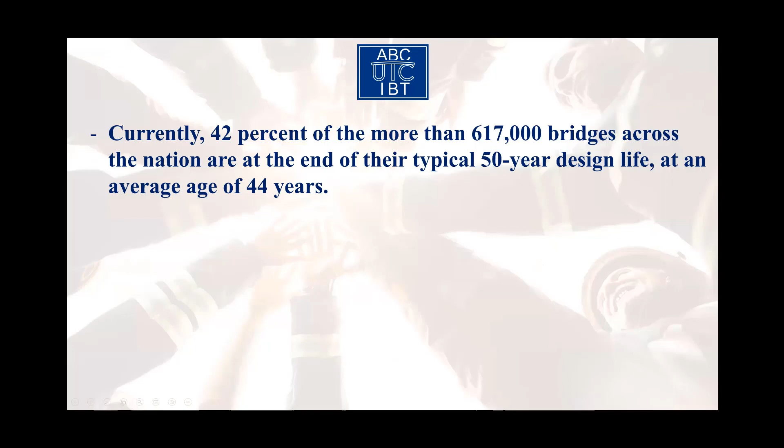So why do we concentrate on bridge engineering? I must also say that up to now we were only concentrated on accelerated bridge construction, which is a form of constructing bridges. Contrary to what you see in the mass media, accelerated bridge construction is not a shortcut. The total construction time of building a bridge is the same or even more than the conventional case.

All it is, let's say for example, if you want to build a bridge, you have to close the lanes, close the traffic during certain times of construction, and that causes a traffic jam. It causes accidents because construction zones are usually a magnet for accidents. There is lots of interruption to people's daily life, and health-wise it's not very good. You guys can relate to that when you're stuck in traffic for hours and hours.

This problem becomes more serious considering the fact that we have 617,000 bridges in the US, but 42% of them, say about half, are going to reach their 50-year design life. There's a difference between design life and service life. We designed these bridges for the type of traffic we guessed would occur over the next 50 years. About half of our bridges in our inventory are going to need some action, whether repair, retrofit, or replacement.

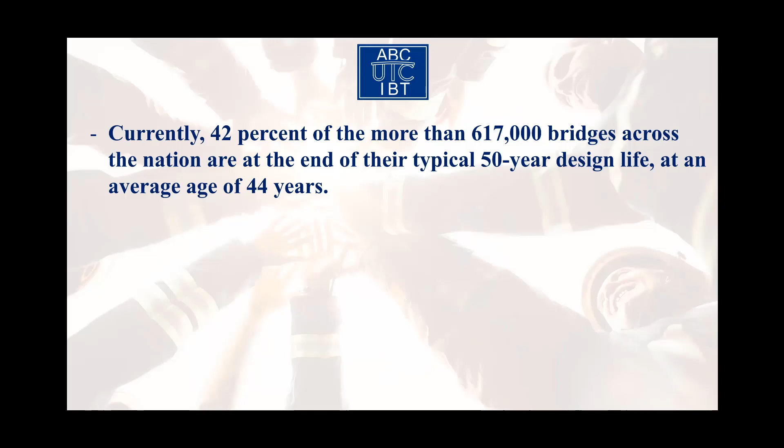It doesn't happen just by advertisement or marketing, things like that. It doesn't happen that way. It happens by technology. So our task is to bring all types of advanced technologies into bridge engineering in the US and communicate that with our stakeholders, the bridge owners, state DOTs, municipalities, and so on. That's why the research we're going to do is so interesting - it's going to be multidisciplinary. We're going to have our faculty work with us closely to tell you about their areas of research.

At the end, I will come back and show you a couple of areas that I work in myself. But before that, I want to show you a video clip that hopefully will tell you how influential we are with bridge owners across the US. I'm going to show you a short videotape recording from one of our conferences in 2019, which really shows our connections, how we connect with industry, and what kind of influence we have. So let me show you this piece of video.

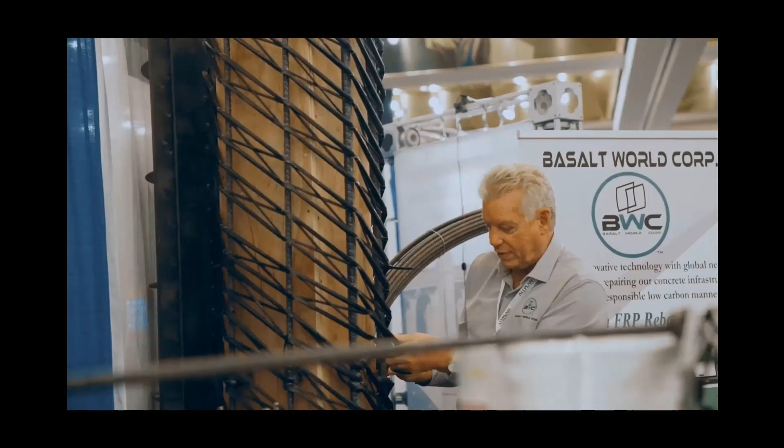We have exhibitors with the latest in innovations, materials, and technologies to support the ABC implementation effort. We have all the experts, those who are making things happen in ABC around the country here. You can talk with them on a one-to-one basis. It's a great opportunity for anyone in the bridge community to participate.

This year's conference is great. There's more attendees than before. It's been very good - we had a lot of traffic at our booth, so we're happy with that, and definitely met a lot of quality people.

This is a great conference. Not only are we talking about theoretical use of accelerated bridge, it's actually a lot of practical solutions.

Whether you are integrated with your ABC and just how you do business, whether you're just starting out, whether you want to advance what you're doing, this conference offers opportunities in a variety of areas. Great networking, the content of the presentations has been fantastic, and really, I've gotten a whole lot out of the exhibit hall as well, interacting with the exhibitors. So I definitely recommend attending the conference.

The award program provides an opportunity to showcase innovative projects and to recognize talented individuals that advance ABC. I think it's important to acknowledge what the industry is doing, and I think we need to continue to highlight people and projects just for the sake of ABC becoming common practice.

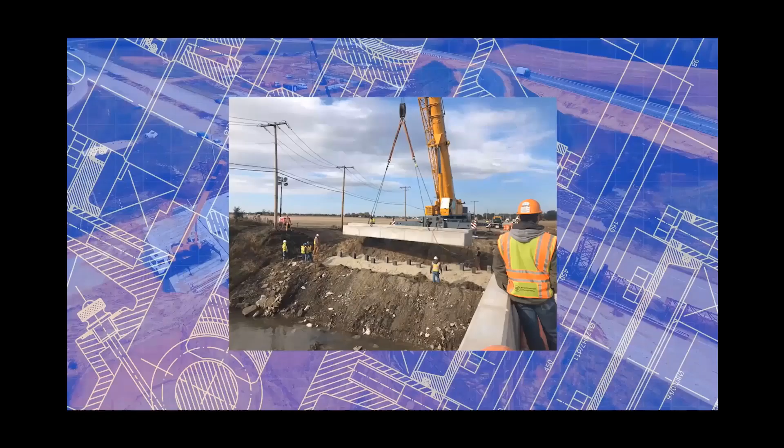We need to get it involved in every project. It's the right thing to do. It minimizes impacts to the public, it improves safety, it improves quality, and it makes me really proud to get this award because I know I was doing the right thing.

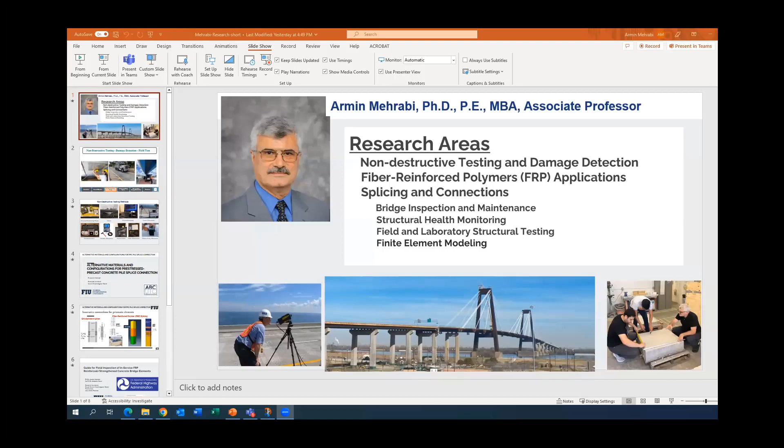Thank you very much, Dr. Azizinamini. So again, my name is Armin Mehrabi. I work at ABC UTC Center, and an extra point is that currently I'm also graduate program director. So for those of you who like to join our graduate program, I will be your first contact, and I will help you through going to graduate program.

And if you are interested in any of the fields and topics that you see today, we'll make it happen that you get an internship or other positions with the center.

So the areas that I work currently, and I have been working for the last 30-some years: non-destructive testing and damage detection is one major area. Then from the relatively new materials in construction and bridge construction, especially fiber reinforced polymers and composites. I currently have several projects in methods of splicing and connection structures. Sub to that, minor areas include bridge inspection and maintenance, basically structural health monitoring, field and laboratory structure testing, and advanced analytical models like finite element modeling, etc.

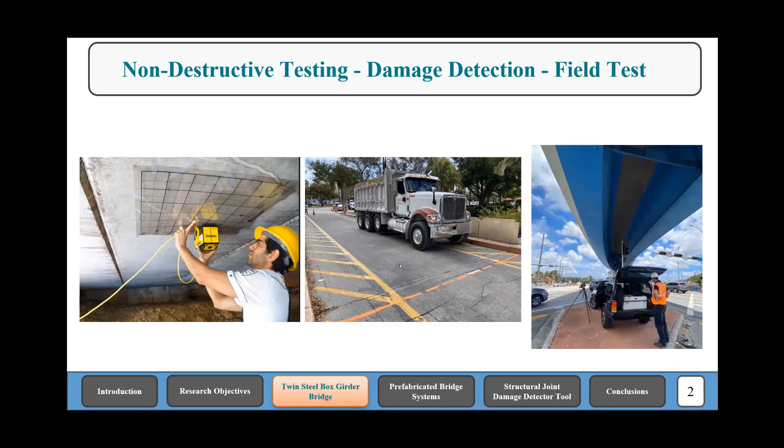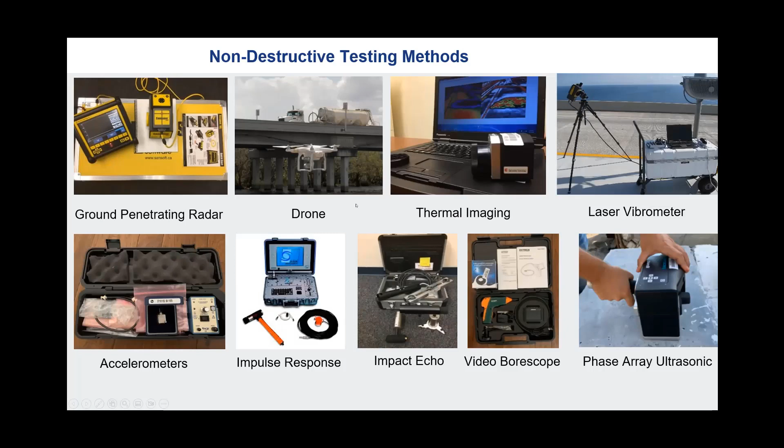Again, my team, which is part of ABC UTC or IBT ABC UTC, possesses - that's the important thing - so we have in our group most of the major non-destructive testing methods available and devices, including GPRs, drones, lasers, thermal imaging, etc. So we are kind of rich in that aspect, fortunately.

Just a couple of projects that I've worked on as examples of what we have been doing. One that is very dear to me and my team is a project we did for the ABC UTC, looking for alternative materials and configurations for pre-stressed precast concrete pile splicing connections, basically to splice the piles that come to the field for driving into the soil. So we went ahead with this project.

It gave us a lot of products, including methods and means applicable not only to the piles, but to all prismatic structural elements as well. So this is a sample of how ABC UTC, or IBT ABC UTC, can help any topic that people are interested in get to its maximum potential.

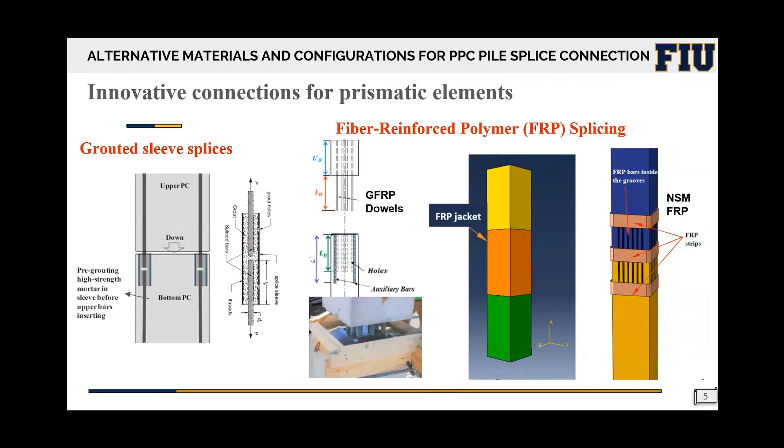As part of that project, we proposed 3 different new connection methods: grouted sleeve splice for prismatic elements, and splices using fiber reinforced polymers, FRP. We received 3 patents on this. That's amazing - during the life of the project, about a year and a half to 2 years, we received 3 patents.

Another project I'm doing for the Federal Highway Administration is developing a guide for field inspection of in-service FRP, fiber reinforced polymer, reinforced and strengthened concrete bridge elements. Interestingly, after so much work on inspection and NDT testing, there is no guide for field inspection of concrete elements that use FRP. So our team took over developing this guide.

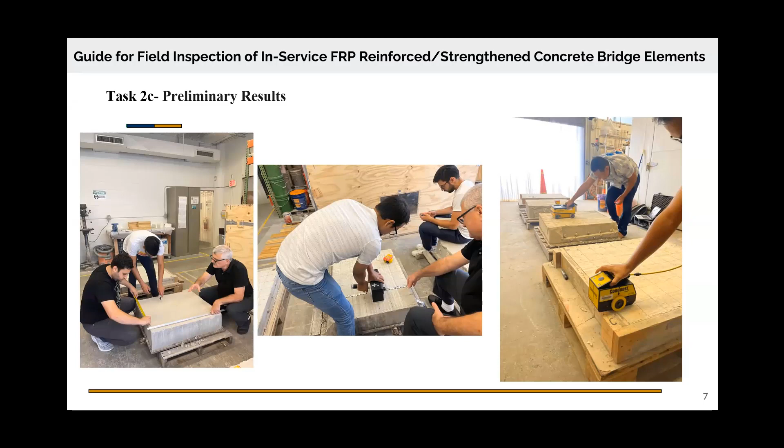That project, in addition to analytical work and review of other works, also involved constructing several specimens, as you can see. I want to include this picture because our work includes lab testing, field testing, analytical work, etc., to give you a picture of what's really going on in these projects. These pictures really show the type of the work.

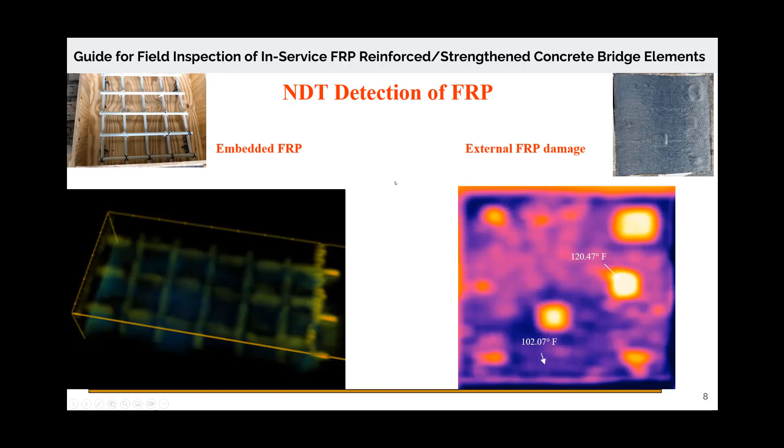As Dr. Azizinamini mentioned, anybody interested in any of these or other topics, please get in touch with me and other faculty. We will be more than happy to help you through the decision making. Thank you all.

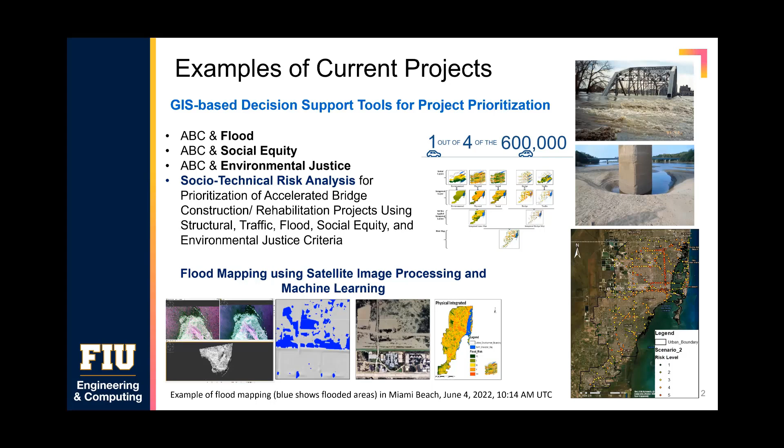So I have another slide for you. These two projects were kind of what we have been working on, and this is just to give you some ideas for the future. For the new center, or the extension of the ABC UTC, which is the Innovative Bridge Technologies, we are really looking out of the box at related technologies that can affect and work with bridge technologies.

Just to give you a couple examples, one idea is to have climate resilient bridges. You've heard about climate change effects in different parts of the country, and each part of our country is being affected by different aspects - extreme floods, sea level rise, excessive heat, wildfire, mostly in the West. These disproportionately affect people, so social equity and environmental justice are also involved.

So the problem here is how to understand the linkages between our bridge system and these different effects of climate change, and how we can address these issues in our projects.

So this is basically a multi-scale problem. First of all, we need to understand the linkages between these problems. This is like a system of systems problem, because each of these factors is actually a complex system itself. So this work includes a lot of planning, field work, sensor-based monitoring, and also modeling and design.

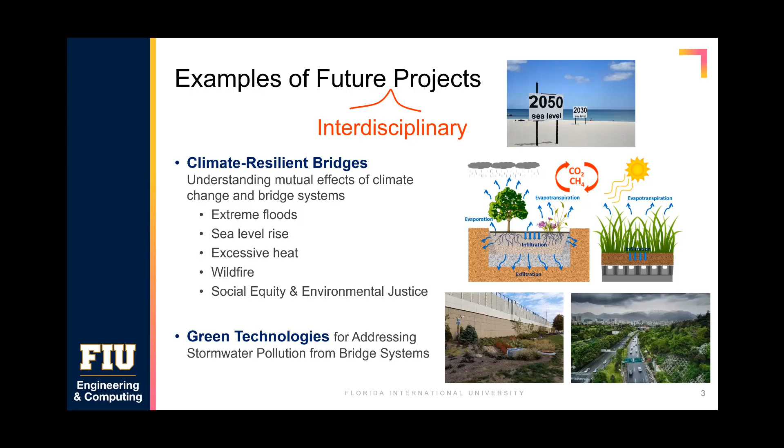But these green infrastructure systems can be integrated into bridge projects to address, for example, the stormwater pollution we get from these systems, and to address the urban heat island that is being increased because of adding our bridges. So we can integrate these green technologies into our bridge projects to address the climate change issues. So with that, I thank you again for your attention.

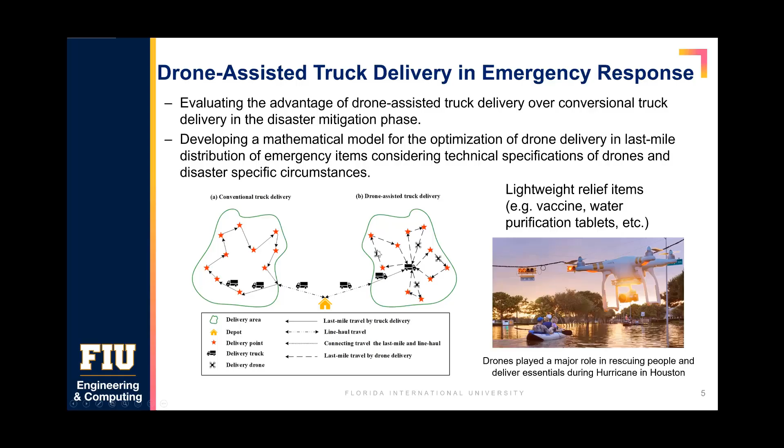If you are interested in the above research, or any other work like my previously published research papers, I would love to work with you.

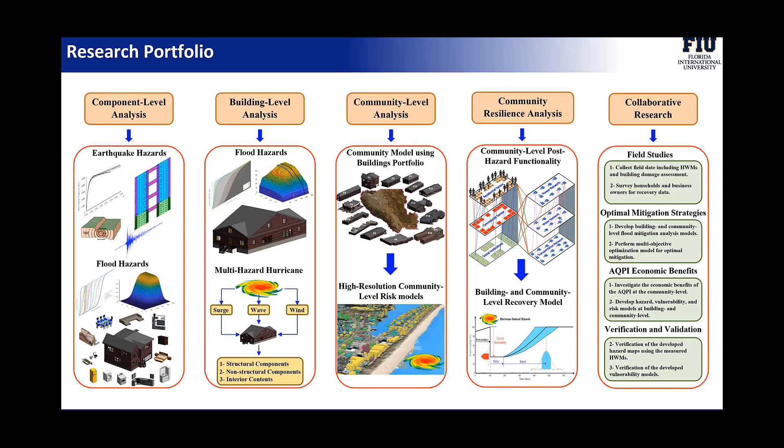Hello, my name is Kingsley Lau. I'm an associate professor in the Department of Civil and Environmental Engineering. Our research delves into the materials durability and corrosion durability of our infrastructure.

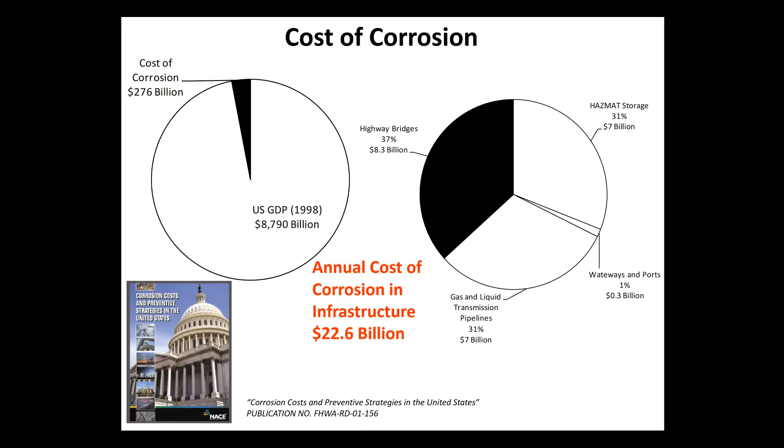Corrosion of our infrastructure is actually a very expensive problem. The GDP, gross domestic product, represents how wealthy a country is, and in most Western and developed countries, the cost of corrosion is about 3% of the GDP. A large part of that occurs with our highway bridges, where the estimated direct cost of corrosion is about $8.3 billion a year. It's money that could be spent elsewhere, especially on social services, if a lot of the causes could be prevented.

We use many different types of construction materials in our infrastructure, primarily steel and concrete. One building technology is reinforced concrete. Concrete is a very good material, especially for compressive forces, but it's not very strong with tensile forces, so typically we put reinforcing steel in to carry some of those tensile loads.

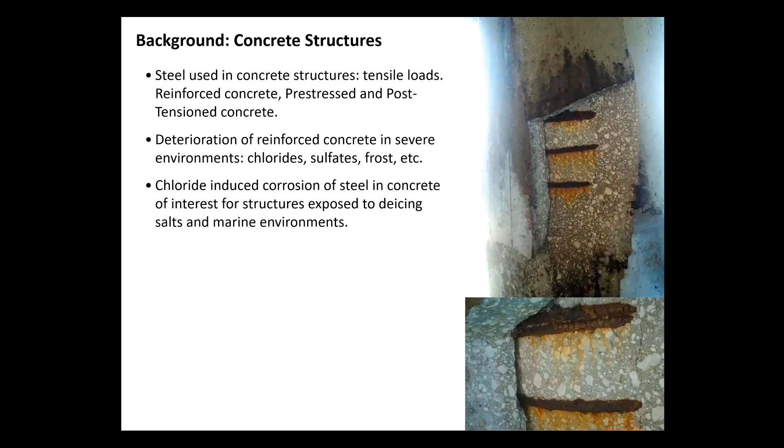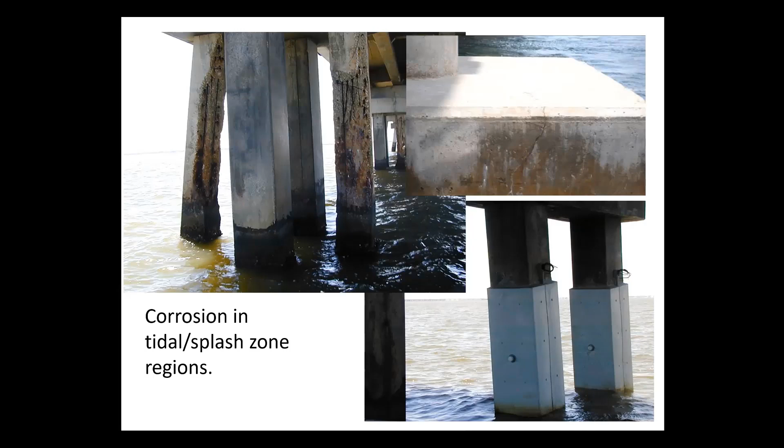On the right-hand pictures, you can see large structural cracks that occur due to corrosion, which leads to further exacerbation of the problem. There are different techniques to mitigate these issues - in the bottom right, you see these pile jackets. Some technologies use electricity, almost creating a battery, to try to protect the underlying steel from further corrosion. But this is an expensive process requiring a lot of time, effort, and monitoring to make sure it's effective. So we continue to look for new technologies and better ways to protect and reinforce our structures.

Other systems include post-tensioning systems. In some of our bridges, we use high-strength cables to hold structural elements together. In these pictures, you see how corrosion can occur even in these protected areas within box girders, causing major, severe corrosion damage in less than 8 years, for example. Very dangerous and causes a lot of problems.

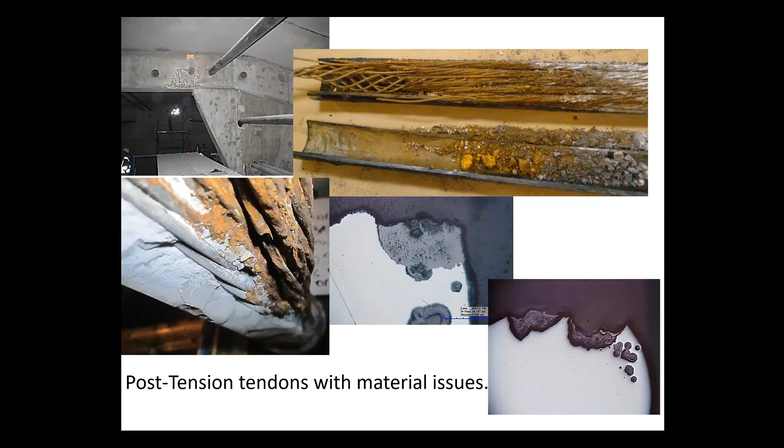You can imagine these tendons are about 4 inches in diameter, filled with 22 7-wire strands and grout materials - like a cementitious material, a very rigid structure. But the force of the corrosion loss was so severe that these elements ended up becoming like curlicue fries - so much stress was released that it completely distorted these very rigid structures. It's a very dangerous issue.

Not only our superstructures, but some of our buried structures also have materials issues that can cause corrosion. I have some pictures here of a tunnel lining with some cracks. The cracks allow salt water to seep in - you can see the moisture penetrating through, and some materials coming out, seeping. It's called efflorescence - the development of cementitious materials that react with the water and come outside.

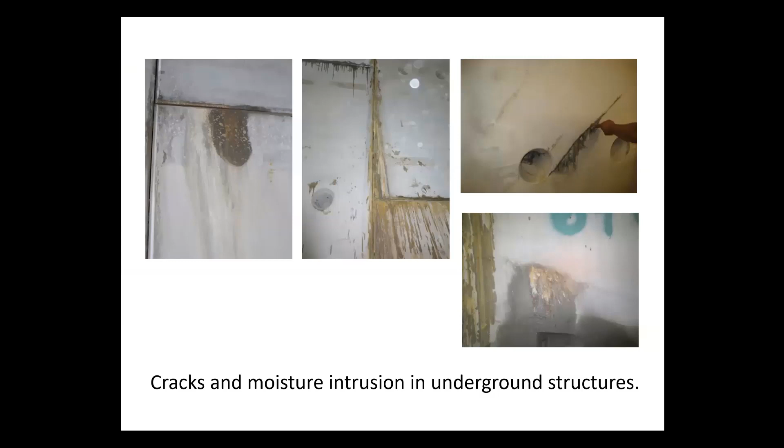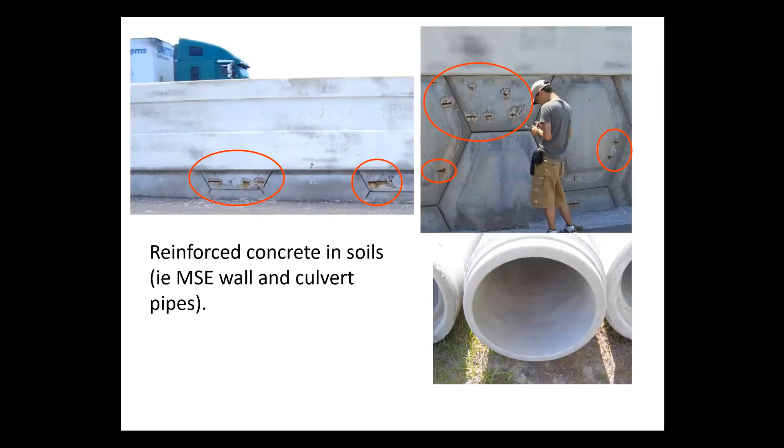It can be a possible future corrosion problem. Some of our MSE walls, mechanically stabilized earth walls, sometimes have problems. The steel parts you see here are part of reinforcing that wall to keep it from falling over. If you lose those steel components due to corrosion, you lose structural integrity.

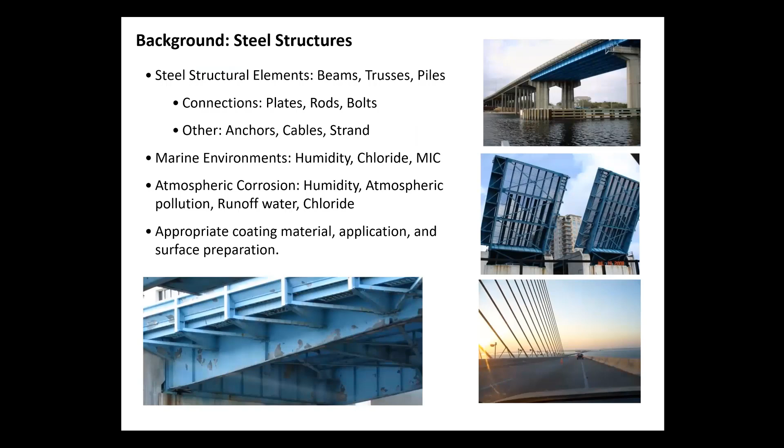Other materials include steel components. We do have steel bridges in Florida. Paints and protective coatings are mainly used to prevent corrosion, but they continue to deteriorate. In Florida, we have every year a large number of paints that need to be redone, and the cost typically is about $26 million annually just for repainting our bridges to try to prevent some of these corrosion issues. So in our work, we try to understand the corrosion problem and give recommendations on how to prevent corrosion and solutions to fix the problem.

And it's an area that we try to look at even in the ABC program. So I thank you for your time.

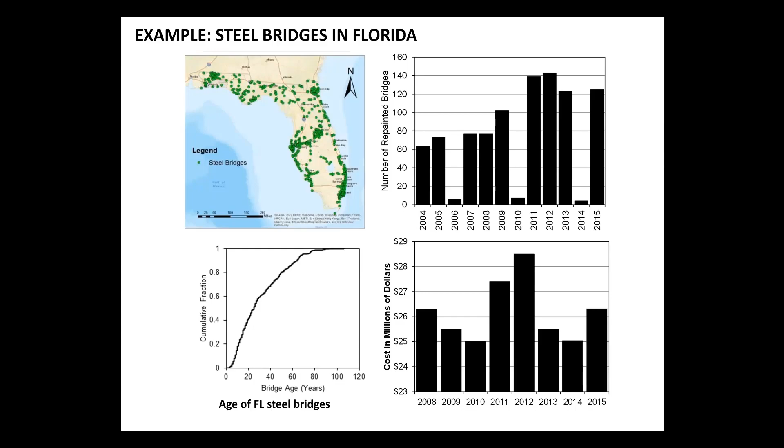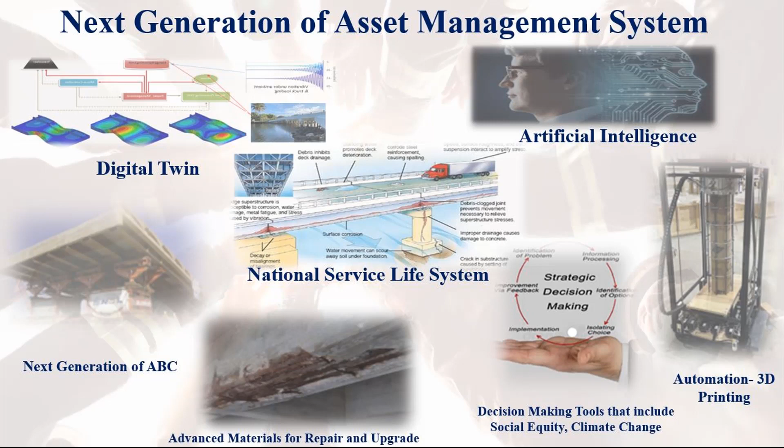All right, great. So let me just very briefly show you some of the work that I'll be doing myself, and then we'll open it to questions that anyone might have. So, I am pretty much, I don't know, good or bad, if my name is somehow associated, if you mention my name at the national or international level, they're going to say expert in steel bridges. But nowadays, actually 90% of my work is in the ultra high performance concrete area, developing solutions based on ultra high performance concrete, or UHPC.

One of the projects I'll be working on with many faculties - this isn't something one person can do alone - working with many faculties not only at FIU but also at different partner universities, is the next generation of the asset management system. In the US, we have a system where every two years every state has to inspect their bridges and send the data to the Federal Highway Administration. A National Bridge Inventory database is used to monitor this, and that's actually used for how the states get the money. So it's time to develop the next generation, and this is one of the ways we are going to try to make the bridge industry in the US number one.